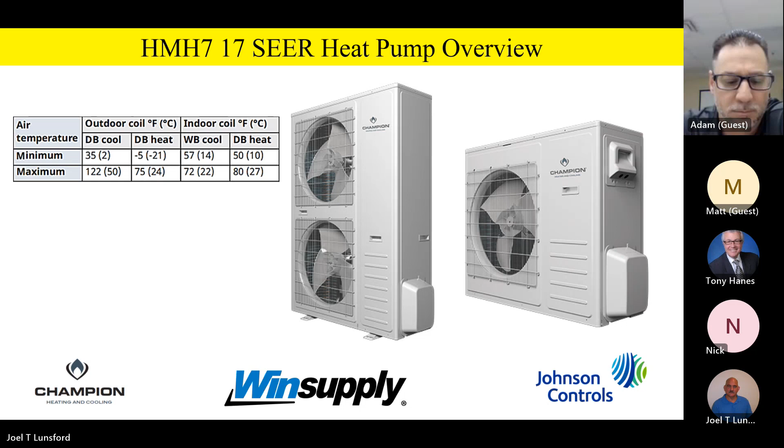The first thing I'd like to jump into, fellas, are air handlers. I know air handlers are going to be a pretty big deal in your area. We're going to discuss the low voltage wiring and setup of the HMH7 with the JHVT, our variable speed air handler, the V meaning variable speed, and also the JHET air handler, the E meaning our high efficiency ECM motor. Now the ECM motor is basically what we call the standard ECM motor, which is a high efficiency motor, but it is not variable speed. To put this in perspective, the variable speed will always have the control board where you're setting up dip switches and so on. The JHET air handler has physical speed taps on that motor, just like the old X13 motor, but we don't call it X13 anymore, we refer to it as our standard ECM motor.

So what we're going to do is review that heat pump selection, that AC and heat pump selection, on the JHVT air handler. We'll also talk a little bit about low voltage block wiring diagrams, going through this wire for wire. In addition, we're going to talk about wiring of the S1 circuit for reduced airflow on the JHET air handler, and how that relay logic works to reduce airflow when we have a reduced airflow command. And then finally, on our heat pump thermostats, we want to make sure that whatever thermostat you select, a couple of things.

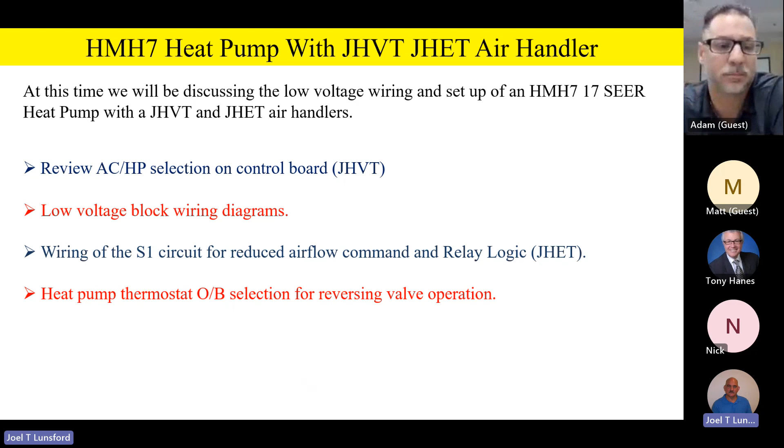No, okay good, excellent. Well fellas, let's talk a little bit about the AC and heat pump switch on the JHVT air handler. When we set this air handler up, there's going to be some dip switches you're going to get into. All the information we're talking about is in the install guide, so be sure and read the installation guide as far as the airflow configuration, your heating, high cool, low cool and so on.

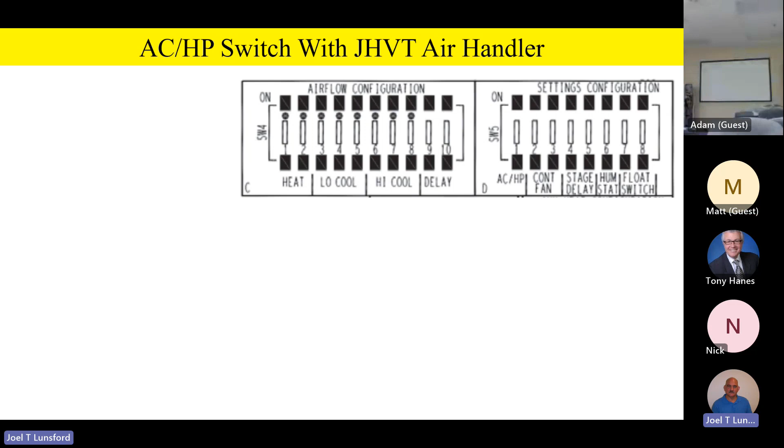But one of the dip switches we want to highlight is the AC heat pump switch. This is really important because the JHVT air handler is a heat pump air handler, a heat pump outdoor product. So we want to make sure and set the JHVT air handler up for heat pumps. On the control board setting configuration, you'll find an AC heat pump switch, and you want to make sure it's set to heat pump mode, because we have to tell the air handler that it's on a heat pump outside.

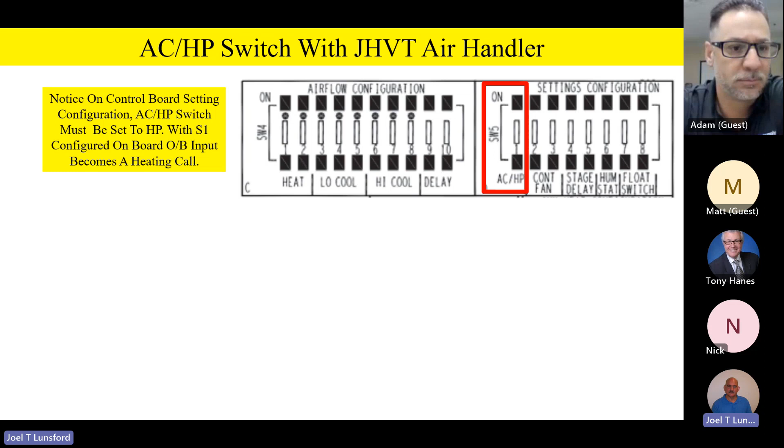Once we select that HP dip switch on the JHVT air handler, remember that this heat pump AC switch configures the air handler for a heat pump. When it's configured for the heat pump, any Y call will be considered a cooling call with the switch in the on position. With the switch in the off position, a Y call will then be converted over to a heat pump call. So basically, if it's in the on position, it's going to ignore the fact that you've got a heat pump input, and a Y call will be considered a cooling call. But if you have it in the heat pump position, a Y call will be considered a normal heating call.

One thing to keep in mind: if you accompany that heating call with a BO selection for reversing valve operation in the cooling mode, on a normal heat pump -- when I say normal heat pump, I mean a Champion heat pump that is not an HMH7 -- you'll get an O signal, a BO signal for the cooling call. But remember something about the HMH7: we energize the reversing valve in the heating mode. It's not bad, it's just different. We just need to remember that.

So if the control is set up for an S1 input, and you get a Y call with a BO signal, then the indoor unit automatically knows that S1 input is going to be an airflow reduction command. It will also know, if we're set up for it, that we'll be set up with an HMH7. So I said all that to say: just make sure your dip switches are set up properly, and that S1 input is set up properly. I think it's on page number 13 -- you might want to write that down.

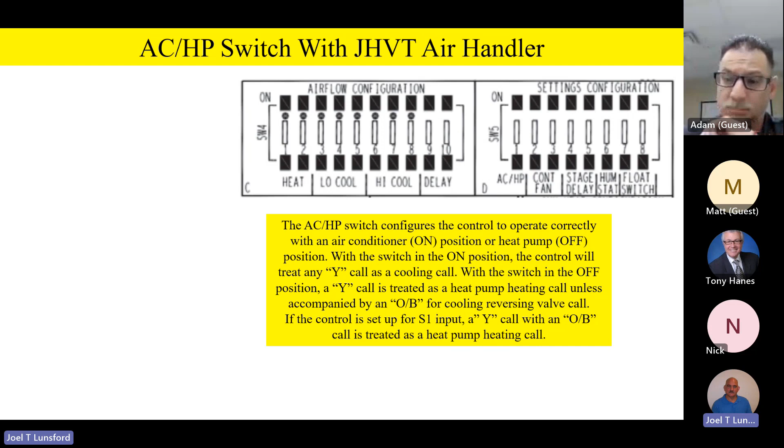I like that way of thinking. So that's exactly correct. Either way, regardless, you want to make sure that AC/heat pump switch is configured properly for the HMH7 outside, because it has to be in heat pump mode. To your good point, thank you for that good question. Excellent.

Okay, so once we've got the dip switches set up, configured as per page 13, let's talk about wiring this thing literally from the thermostat to the indoor unit to the outdoor unit. Now you'll notice that the B/O selection energizes the reversing valve in the heating mode of operation. This heating mode of operation is a little different than our other Champion product. However, it's just different, it's not bad, it's just different. So heating mode on the HMH7 will energize the reversing valve.

W2, if you have a two-stage heat strip - you may not have it down in your area, but if you do have a two-stage heat strip, W2 will go to W2. That's your second stage auxiliary heat. W1 will be your first stage heat strip auxiliary heat, and that's going to carry all the way outside.

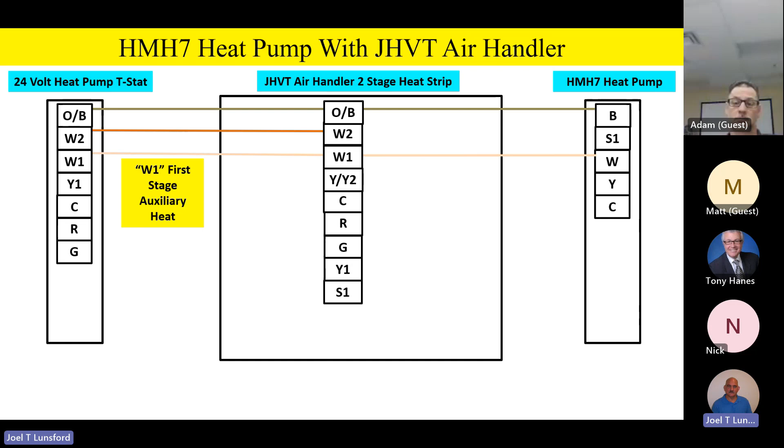Now, there's two functions for this. Number one, it's first stage auxiliary heat if the thermostat calls for auxiliary heat. But also during defrost, the outdoor unit's going to generate a W signal outside during defrost, and that's going to bring the heat strip on during defrost. Because remember, team, whenever we go to defrost on our heat pump, it's actually going to be in the cooling mode of operation. So we want to make sure, if it's wintertime and you go into defrost, that you don't freeze the homeowner out during defrost. That's why we have that W coming back into our heat strips during defrost from the outdoor unit.

Y1 from the thermostat, or if you just have a single stage thermostat, Y from the thermostat will go to Y/Y2 on the indoor unit, and that goes outside to Y. That's basically your compressor call. But you'll notice something here: that Y/Y2 on the air handler means that Y or Y1 from the thermostat is actually going to be commanding high-speed airflow as the default when we energize the outdoor unit.

So just be sure and remember that the indoor unit is going to be defaulted, on a compressor call, to high-speed airflow. This is going to be important in a minute or two, as you'll see that we're going to energize S1 for a low speed command or a low airflow command. So that's important that we remember. On these products, on the HMH7, high speed or 100% airflow inside will be the default airflow point.

C goes all the way through, as we commented earlier, common to common, all the way through 24 volt common. R is 24 volt hot. It does not go outside - that's an important concept we want to remember. The R terminal does not go outside, we don't need it outside for normal function. And G is going to be our fan call.

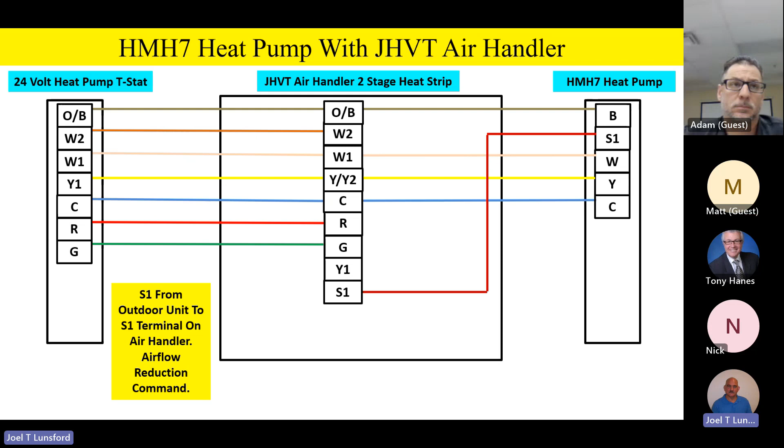That's pretty straightforward. Now on the JHVT air handler, you'll notice there's going to be an S1 input. That's going to go to S1 outside, and that's your airflow reduction command. So remember, team, on the HMH7, the default airflow inside, when it first comes on, is going to be 100% airflow. Then, based on its point of modulation outside, the outdoor unit will make an intelligent decision when it hits about 60 to 65% modulation as it's screwing down its capacity.

It'll then command a lower airflow inside, 60, 65% airflow inside. The reason we do that is we want to closely match that outdoor capacity with our indoor airflow so that we have good comfort and humidity control and so on. So remember, on the HMH7, the S1 command is an airflow reduction command. Any questions or comments on the basic block wiring diagram so far?

Not yet. Okay, good, excellent.

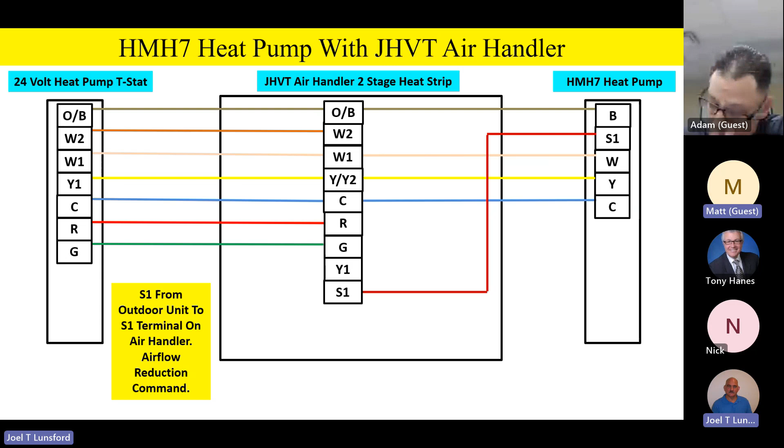So as we take a look at it, here we are, cruising along at 100% capacity with full airflow. Well, when the outdoor unit reaches a point of capacity where it wants reduced airflow, it's going to energize that S1 circuit, the S1 input from the outdoor unit, and tell the air handler to go to 65% airflow. So remember, on the HMH7, the S1 input to the indoor unit is a command for reduced airflow.

Is that for dehumidification? It is, it's for dehumidification, but you also got to remember the outdoor unit will modulate between 35 and 100% capacity. When it starts getting down into that 60-65% capacity, we reduce the airflow, to your good point, because if we were blowing 100% airflow but only at 55 or 60% capacity, your humidity control is going to go in the toilet, isn't it?

As we start screwing the capacity down, we want to reduce the airflow to reduce humidity in the house. The HMH7 isn't going to be at 100% all the time - it's going to be cruising along somewhere between 65 and 80% capacity most of the time during the day, once the house starts cooling off. This allows us to have longer run times, which is good for humidity control, because you can't dehumidify a house unless the unit's running. So we have extended run times with very efficient operation. We modulate back and reduce that airflow to control the humidity and provide that extra level of comfort. That's exactly why we reduce airflow - to help handle that humidity.

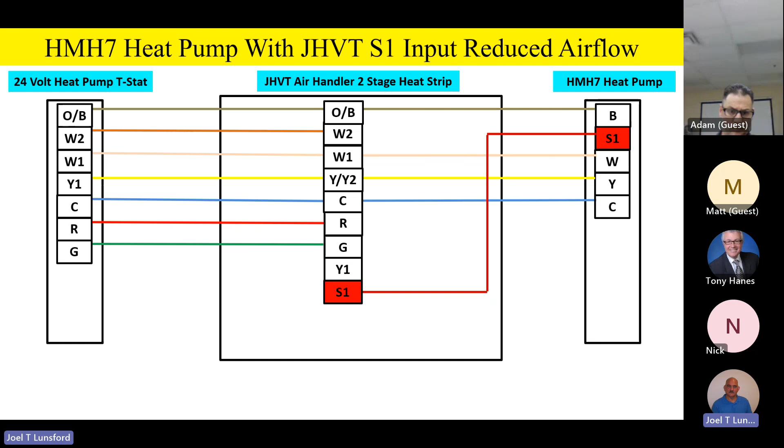So the JHET air handler is our standard ECM motor air handler. There's going to be a relay in there - you guys can kind of see there's a little relay down there - and that's the 001 relay kit. I want to remind everybody that we recommend you buy that HMH7 AK001 relay kit because it has some harnessing in there, a little relay board, and it also has a biflow filter dryer already included. So that's always a good idea, just to buy that install kit - it's easy and convenient.

However, we've had some contractors say, can I just put my own biflow filter dryer on? And the answer is, of course you can. Can I take a peanut relay and do exactly what we're doing here and just make up field wiring instead of bothering with the harness that comes in the kit? And the answer is, of course you can. But we find most contractors enjoy having that 001 kit, where you have the relay already in there, a biflow filter dryer, and convenient harnessing to make it easy. Either way, a plain peanut relay, single pole double throw with a 24-volt coil, will work fine if you want to make up your own field kit.

So anyway, the JHET is going to have a relay in there that we're going to utilize for relay logic to reduce that airflow. We're going to show you how that hooks up here in a minute or two.

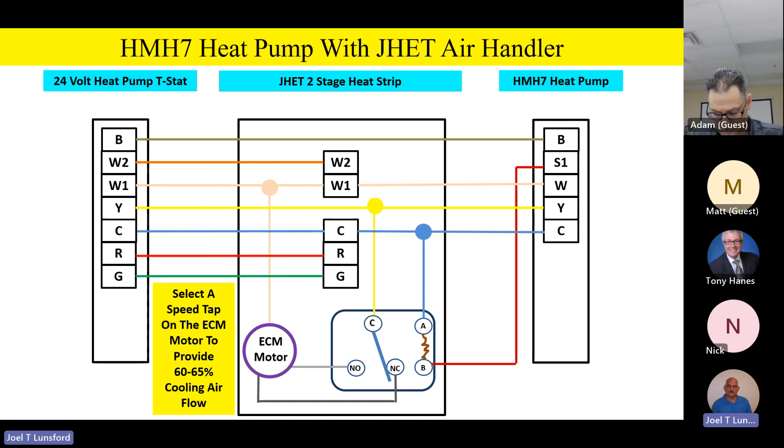So if I had a choice between 55 or 70% airflow on that normally open contact, I'd probably go with the 55%, but we're asking you to give us a nominal average of about 60 to 65% on that speed tap. And if you have to select one, make sure it's closer to 60%, because that'll give you good humidity control. Does that make sense to everybody?

Is there any questions or comments on the block wiring diagram?

Everybody good? Yeah. Okay.

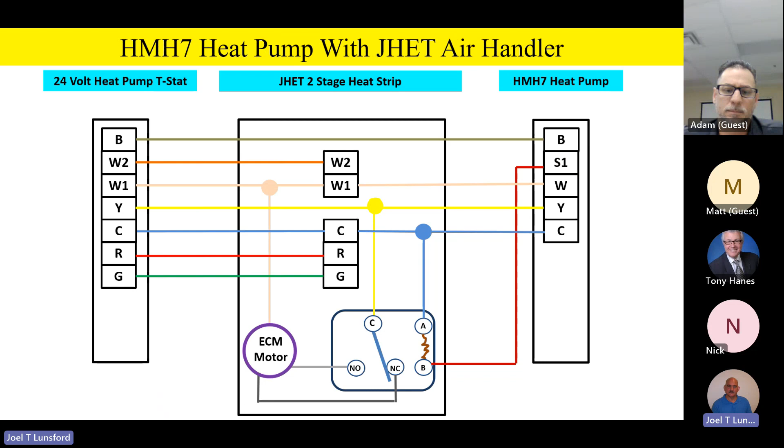Couple things I want you guys to remember: when I have an S1 input, let me do that animation again, watch it closely. When I have an S1 input, we're going to switch that relay and command reduced airflow. There's our 100% airflow. When we give it an S1 input from the outdoor unit, that switches the relay and gives us reduced airflow. In addition, remember that any W1 call or auxiliary heat call, if present, will drive the fan to 100% airflow. Even with an S1 input, it'll have no effect, because on the ECM motor, it's going to look for whatever airflow has the highest command.

If it has more than one speed command on that ECM motor, it'll always take the highest command it's receiving. And finally, please remember there will be a W1 input anytime we have a call for defrost operations. So remember, any W1 input will drive the fan to high speed, and we will have an auxiliary heat call during defrost. That's important to remember.

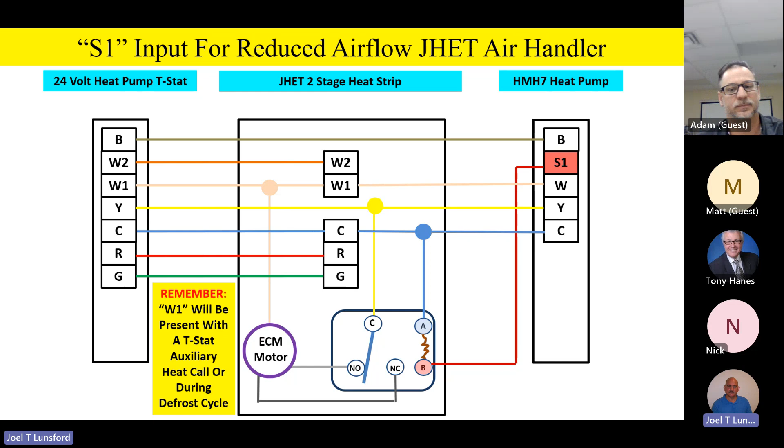Now, Tony had commented yesterday that you guys may occasionally sell like an 80% furnace, so I wanted to go ahead and throw a little dual fuel W circuit control in here for you. We noticed that in dual fuel applications with the furnace, the outdoor unit's normal sequence of operation will be to bring the indoor unit on for about a minute, and this can cause some short cycling of the furnace. So there's a little circuit in here we're going to talk about, our dual fuel W circuit. And what we're going to ask you to do is choose one of these little dry out heating thermostats of about 65 degrees. Hey, Joel.

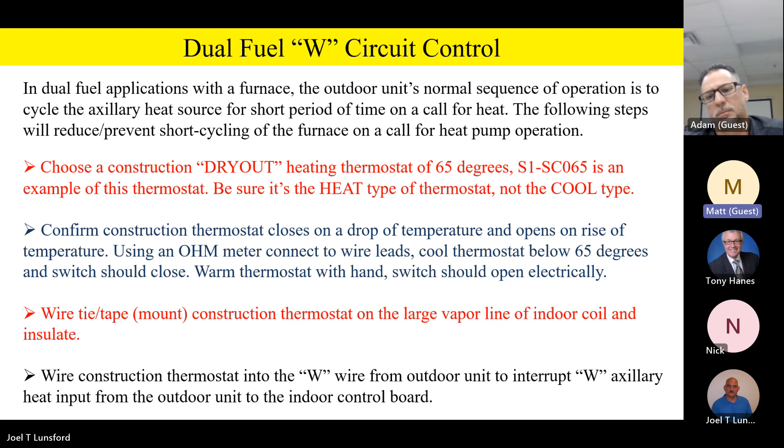Joel, so guys, do you do any dual fuel applications? Do you anticipate that? We don't want to cover something that... Yeah, that's a good point. Yeah, straight AC with gas heat. Just straight AC with gas heat. Okay, all right, well let's go ahead and jump over that then. We won't bother with that, let me fast forward a little bit here. We won't bother with that today then.

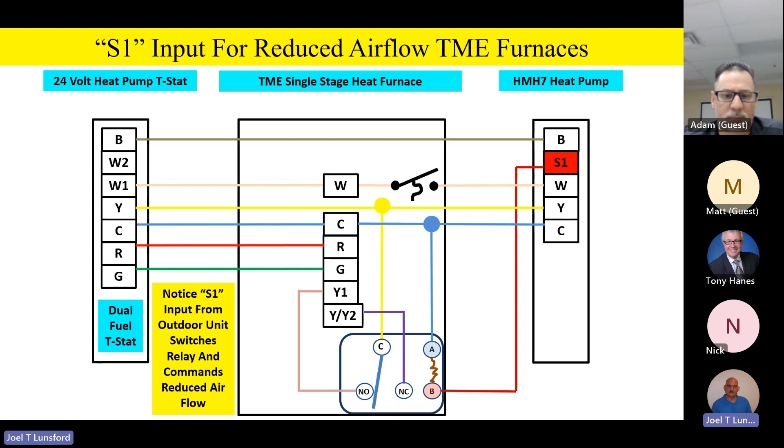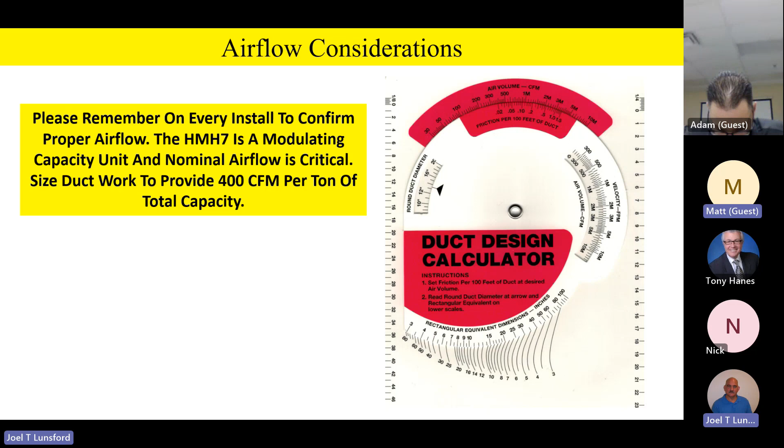But let's go ahead and talk a little bit about some airflow considerations. This goes along with any of our HMH7 modulating units. We want to make sure you consider airflow as a main consideration, because on every install, the airflow on an HMH7, since it's modulating, is going to be critical. So we commented earlier, we want to make sure you size your ductwork to provide 400 CFM per ton of total cooling capacity. If I've got a 2-ton unit outside, I want to make sure my ductwork will support 800 CFM. It's important that you build your duct systems and commission them to provide 400 CFM per ton of capacity.

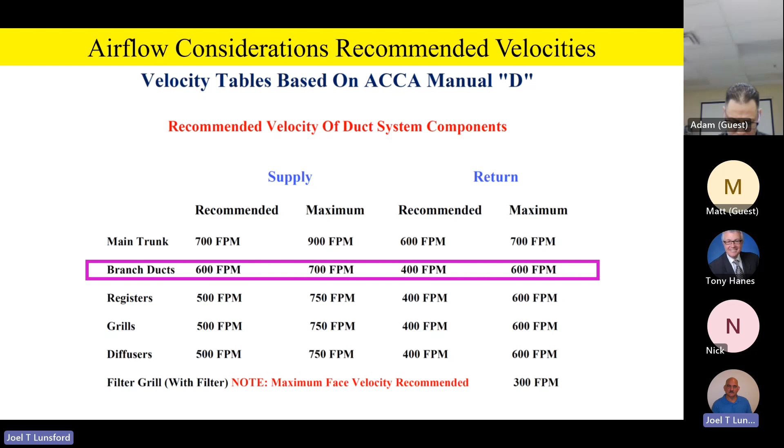Your branch runs, I'm not going to read every one to you, but your branch ducts ought to be about 600 feet a minute. On your takeoffs, registers and grilles, about 500 feet a minute is the recommended velocity. Diffusers about the same recommended velocity. You'll notice on the returns about 400 feet a minute velocity. Now this is really, really important, especially if you've got single returns in a hallway like you might have down in your area. This is really important.

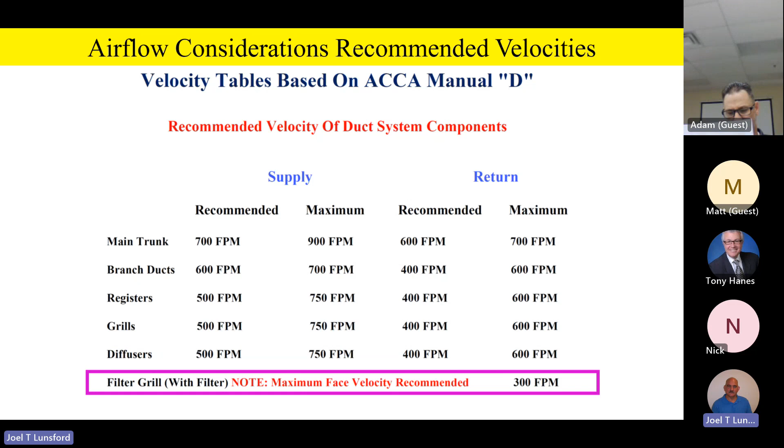If you've got a filter grill, if you have a return grill with a filter in it, Manual D recommends that you size that filter grill so that the velocity across that filter does not exceed 300 feet a minute. What this means is you're going to probably have a little larger returns than you normally would. But this is a good thing, because on a HMH7, it's a modulating unit, so we want to make sure we've got plenty of good return and keep those velocities across that filter in check.

So please consider these when you are installing these units and commissioning your ductwork. Build them for 400 CFM per ton total capacity of airflow, and then watch those velocities, because they can sneak up and cause erratic operation and possible icing of the coil. So please watch those velocities as well.